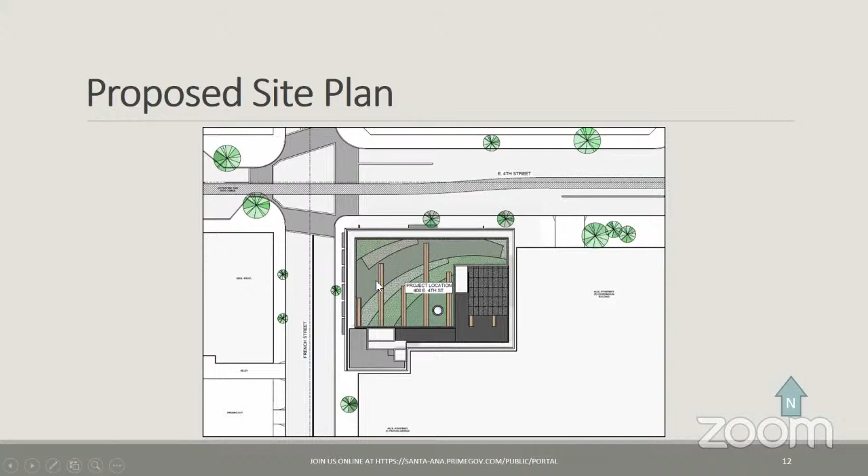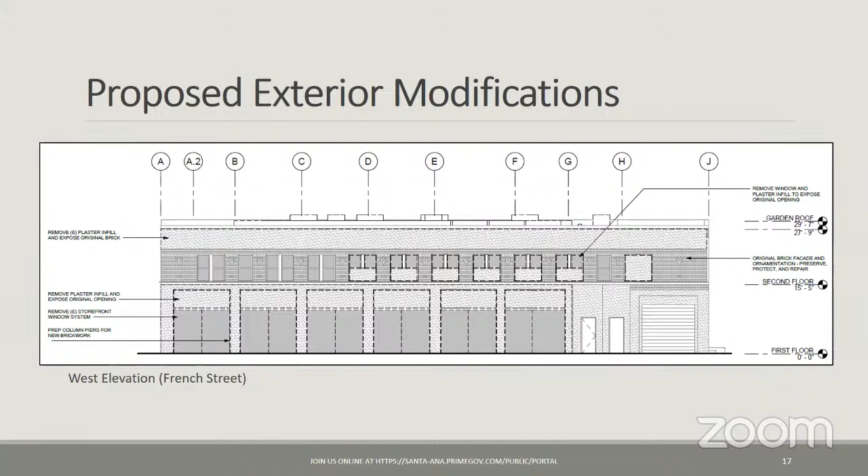This next slide shows the alterations along the west elevation, along French Street. They include the removal of the existing plaster infill to expose the original brick, the removal of the storefront system, the preparation of the column piers for the new brickwork, and the removal of plaster infill exposing the transom openings along here. The removal of windows and plaster infill exposes the original openings shown up here on the second floor, and there is preservation of the original brick facade and ornamentation. Again, the same elevation along French Street, but as a rendering to show those changes.

Staff has determined that the project complies with the Secretary of Interior standards for rehabilitation. The analysis determined that the proposed project meets the standards because the rooftop additions -- the penthouse structures for the stairs and elevator, minus the shade structure -- are contemporary in design, yet compatible with the materials, features, size, scale, proportion, and massing of the historic commercial building.

Most importantly, due to the additive nature, the rooftop addition allows for the option to be removed in a way that the essential form and integrity of the historic property and environment would not be impaired. Staff would like to note that the shade structure originally proposed is not included as part of the project moving forward. Lastly, many of the building's character-defining features and materials will be restored and retained, and the building would continue to convey its historic association with the early commercial development of 4th Street and remain eligible for listing in the city register.

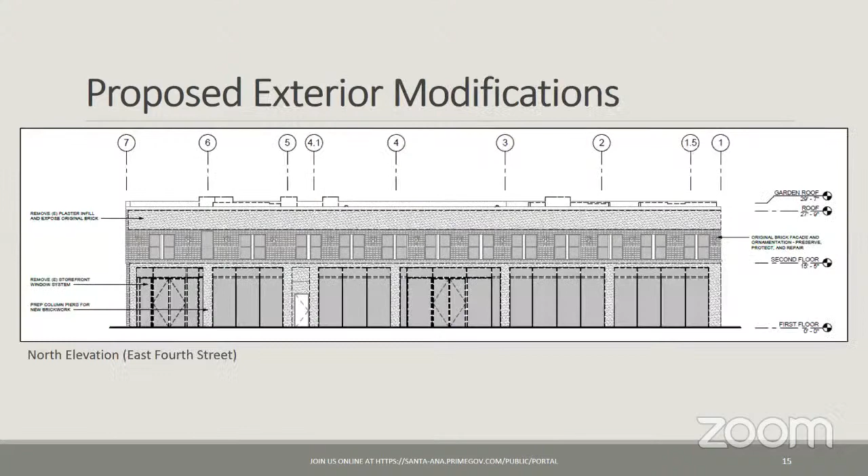If I have another question, going back to the facade on French and 4th Street - if I understood your comments, the supports between the windows, which I think you said were covered up, stuccoed over, and that stucco is going to be removed to reveal some sort of brick facade underneath. Is that to be uncovered and exposed, or demolished and new brick applied, along 4th Street?

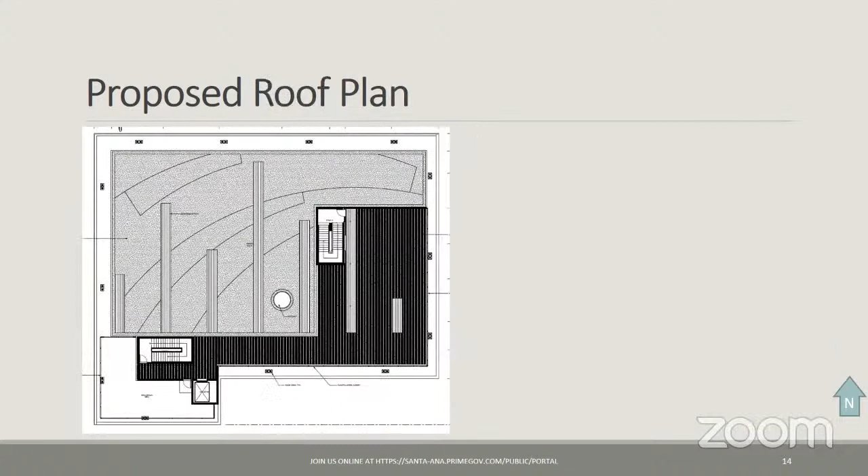What will the surface be? Perhaps the architect could explain that when we invite her up. Another question along with that, why isn't it enclosed like the other mechanical area with the stucco wall? The mechanical equipment, yes sir, oftentimes for building code purposes can't be enclosed. There are certain ventilation requirements.

Understood, thank you sir. Tim, yes, excuse me Chair, just to go back on one topic, we were talking about this being a church. This is the church that was down on the southern end of Santa Ana where the Legacy is being built, is that correct?

The Legacy apartments? Sunflower apartments, Legacy apartments down at the south end of the city. There was a church there. The Legacy is being built and the church is moving up to the center of the city. I believe that's the case, but the applicant can confirm. Okay, I'll wait for the applicant on the next question, so we'll go from there.

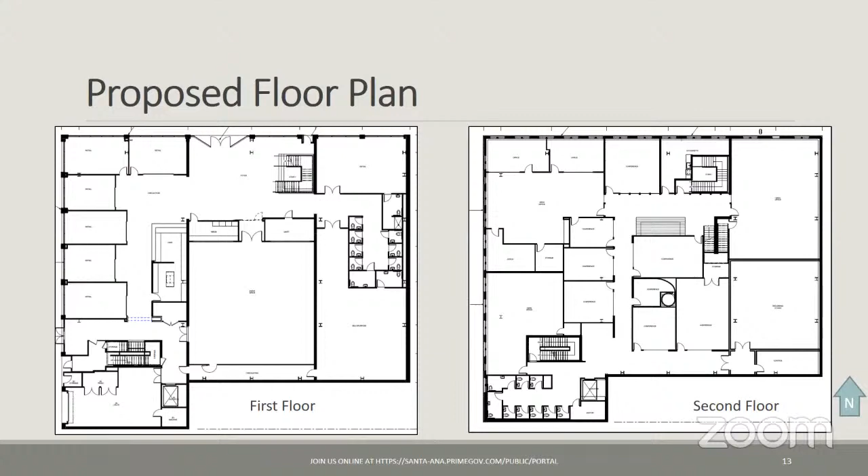Are there any other questions? Commissioner McLaughlin. Is the parking lot attached to this property, or is that just public parking? The parking lot, I believe, is for the apartment units. There's a public one along French Street behind, at 4th and French Street. I don't recall if that one is public — it might just be for the apartments, the condominiums. Okay, just curious.

Point of clarification, those are not apartments — that's the Spectrum Condominium Complex, which were apartments at one time but were converted into condos. But anyway, that's not part of your project. Are there any other questions? I feel like a broken record.

Okay, all right, you folks can sit down. Are there any members from the public that would like to speak on this?

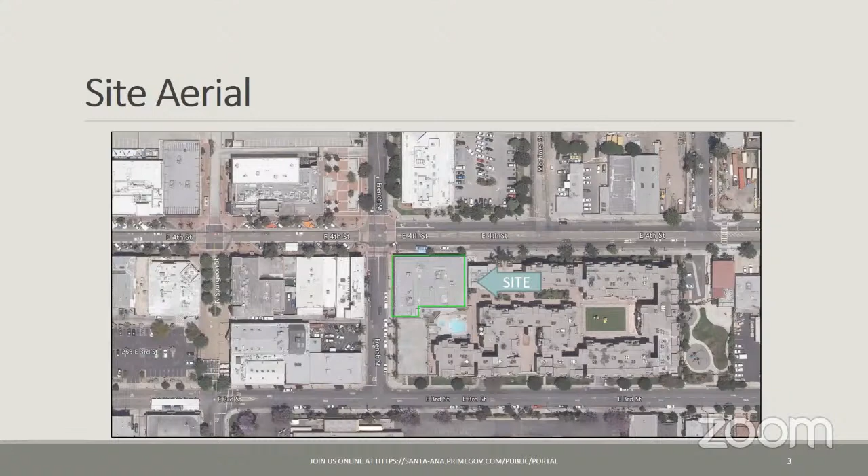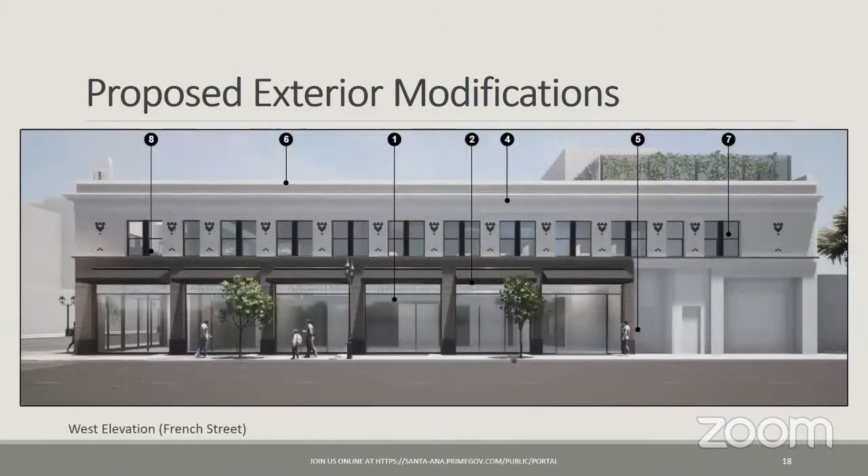Are you saying that the awnings represented are too shallow? Yeah, but they're not retractable, they're fixed. What we asked Mike Hare to do was to have retractable ones, and they came out a little further and look more historic. You see those awnings required on the Centaur building.

The signage issue has always been a problem in Santa Ana. We have backlit lighting or signage like what we have here, and it's not historical. We have it on the West End Theater, the Centaur building, the Yost building, and other buildings on Broadway.

They're backlit. Are you saying the signage on those buildings is correct or incorrect? Incorrect, they weren't. You didn't have neon, you didn't have backlit signs in the 1920s when these buildings were built, and they're not compatible to that historical look.

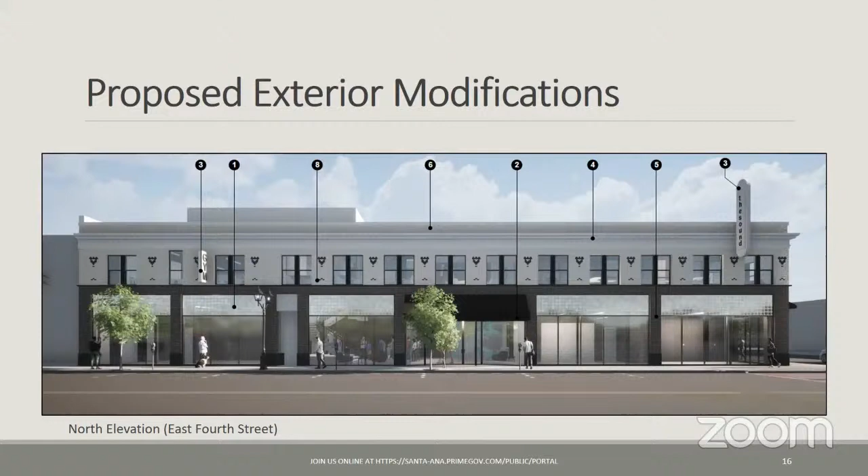Mr. Pedro, tell me, seems to me that don't we have a historic sign ordinance that was largely crafted by Joe Musel many years ago. Did you guys know anything about that, Phil? Are you aware of that? I'm aware of that. Joe was given $10,000 in 2006 or so to do one, but that was never approved by this commission or approved by the city council.

If you're talking about the draft of the historic sign ordinance, that was never adopted. Yeah.

The sign that's being proposed, which I asked about at one point, appears to me to be a blade sign is what I would call it. I'm not an expert on 1920s signage, but I'm assuming that sign would need to be lit with some sort of spotlights that would come out 3 or 4 feet from the facade and be shining on that blade sign. Is that what's being proposed? Sure.

Thank you for the question, Phil. My understanding is that we go through a separate signage approval process for the specific sign with Pedro, and I would assume we could take some of these things into consideration as we work through the approval process for the signage.

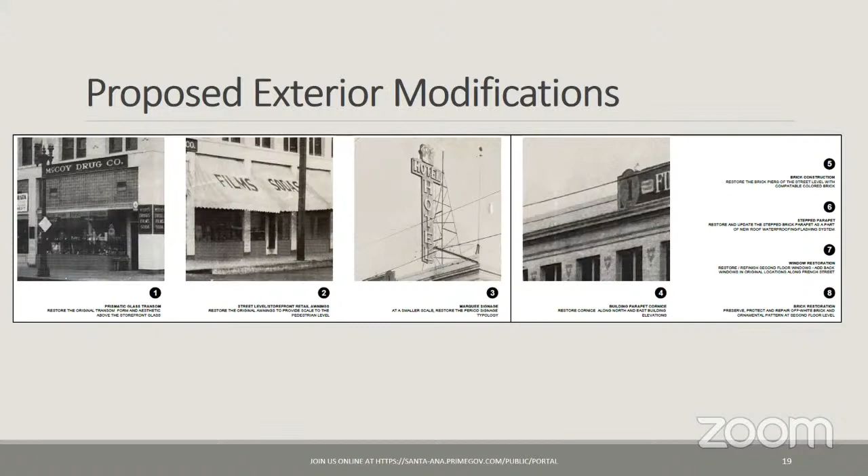In addition, there's new technology and new building code requirements that might require efficiency requirements for lighting. Sometimes neon is appropriate, sometimes it's not. Staff also works with applicants for signage to identify lighting that won't compromise the historic integrity of the building.

Front lit channel letters are something we don't normally allow. They're too abrasive, so we usually allow halo lit or backlit, which creates a softer light, or uplighting with external lights that shine onto the sign. Those are more appropriate for a historic sign, and you'll see them more common in places like downtown Orange, where they have neon signs, uplit lighting, or halo lit soft lighting. We would work with the applicant to ensure the lighting and sign does not compromise the integrity of the building.

With regard to the signage issue, that will become a separate issue, and perhaps we do need to look at the historic sign ordinance, and that's something this commission ought to look at. With regard to your comments about the awnings, I do remember that controversy, and you are correct, that's a good point.

I do think awnings make a huge statement on a building, and how can we address that? If the commission wishes, they could recommend a condition of approval to include a specific type of awning, or some sort of retractable awning that's much more appropriate, as the public mentioned. We could do that. Staff could also be given discretion to work on the final awning design, and if the commission has a specific example like the Centaur building, we can certainly look at that as well.

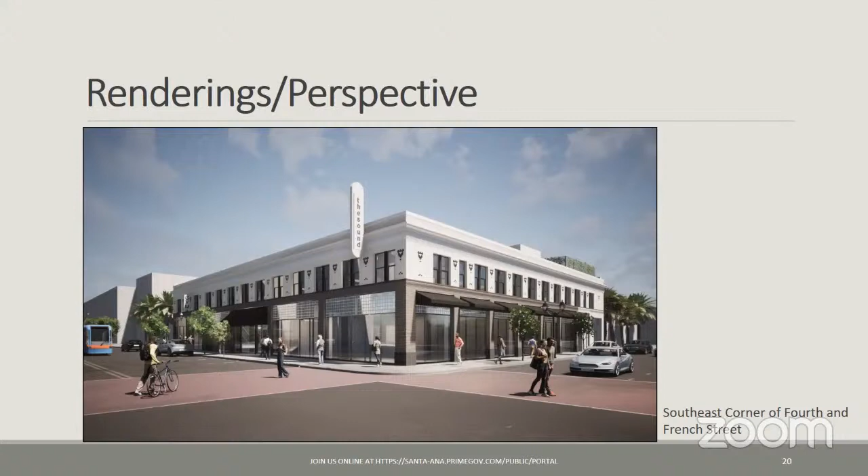Does the commission have any final questions of staff? Seeing none, is there a motion to approve this matter?

I guess I would say as amended. Chair, I would like to move that the commission adopt a resolution approving a certificate of appropriateness for historic exterior modification, application number 2022-03, with the condition of having appropriate signage and awnings.

And addressing the windows issue. All right, I second that. Okay, we have a motion and a second.

Secretary, please call for a roll call vote. Commissioner Carpenter, yes. Commissioner Christie, yes. Commissioner Hardy, yes. Commissioner Ship, yes. Commissioner Peña Sarmiento, yes. Commissioner Frazier. Commissioner McLaughlin, aye. Vice Chair Marashi, yes. Chair Rush, aye. Motion is approved with majority vote, with Commissioner Frazier absent.

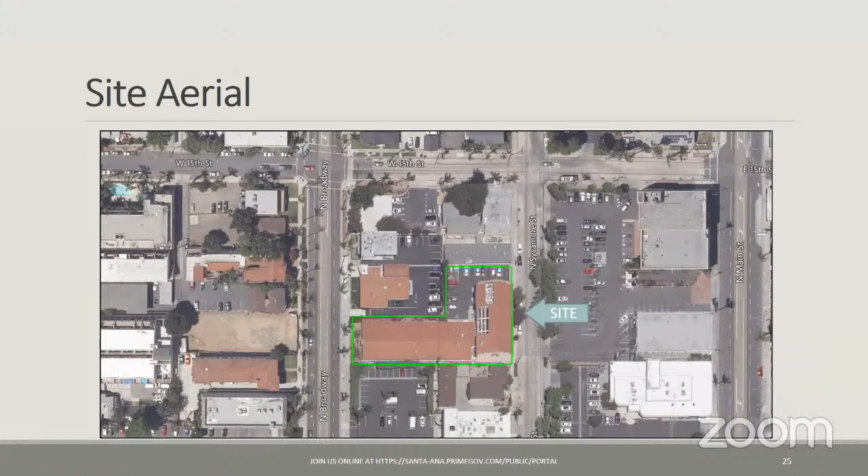The property is known as the Santa Ana Tustin YWCA building, and it's individually listed as number 63 on the Santa Ana Register. It was placed on the register in 2001 and categorized as landmark. The building was constructed in 1950 and dedicated in February of 1951.

The property is a late and modest example of the Spanish colonial revival style applied to institutional buildings in Santa Ana. It was built for approximately $114,000, designed by architect Harold Gimeno, and constructed by notable local builder Allison Honer.

The building was Santa Ana YWCA's first purpose-built headquarters and included a gymnasium, a kitchen, nursery, lobby, meeting rooms, and offices. The next couple of photos provide the site photos of the building as it exists now.

This first slide shows a southeast view of the 1-story wing north facade and the east view of the west and south facades.

This next slide shows the south view of the north facade of the 1-story wing and the west facade of the 2-story wing. It also shows the northwest view of the east and south facades from North Sycamore.

We've also included a couple of older perspectives of the site showing the east to west wing and the north to south wing here. The building was eligible for listing as a local landmark under Santa Ana Criterion 1 for embodying the distinguishing characteristics of the Spanish colonial revival,

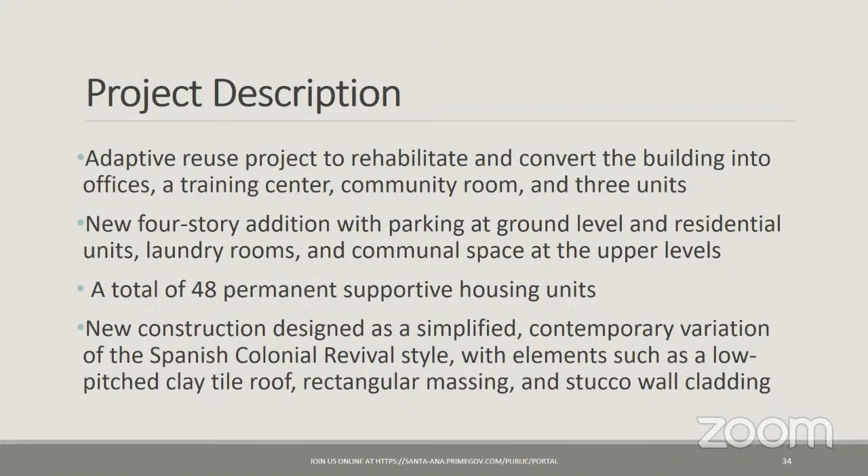This is just kind of a description of what I just provided. Now to go over the scope of work in better detail here, I'm going over a couple of site plans and floor plans to demonstrate the work that's being demolished, the work that's being kept, and the new area of improvement. So here we have the existing site plan.

This gives you a better understanding of that same situation. The east-west wing is highlighted here roughly—it's about 9,200 square feet or so. And the north-south wing is about 5,800 square feet.

What's being kept as part of the 1-story structure is approximately 126 feet of the east-west wing here. About 53 feet or so of the existing 1-story structure would be removed in order to accommodate the new structure. The entirety of the north-south wing will be demolished.

Here we have the proposed site plan. You can see that the portion that's going to be retained here includes 126 feet. And here we have the ground floor parking.

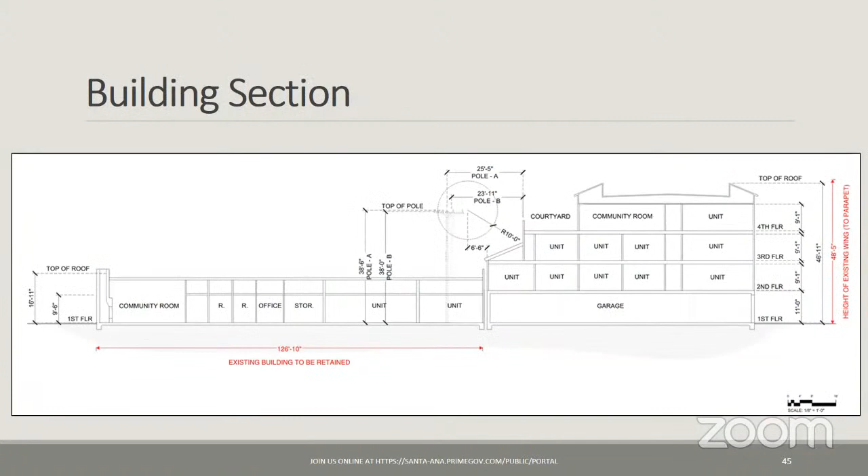Is this what you're referring to, Commissioner? Right, right. So there is going to be a space between the two buildings, right? I'll probably defer that question to the architect, but it looks represented that there's a space. There is a space, yeah, I'll talk to that one. Okay. I just want to make sure, am I saying that correctly? Okay, thanks.

Are there any other questions from commissioners? I have a quick question — is Edison going to remove that power pole right in the middle of things there? I hope. As currently proposed, no. It would result in more alteration of the historic structure, which we would advise against. So as part of their entitlement process, we're looking for ways for that to be accommodated as existing.

Commissioner Hardy: I'm curious about the elevator shaft, the tallest part. Is that a design element or is that something necessary? Why can't the elevator shaft end at the other roof, the tallest roof height?

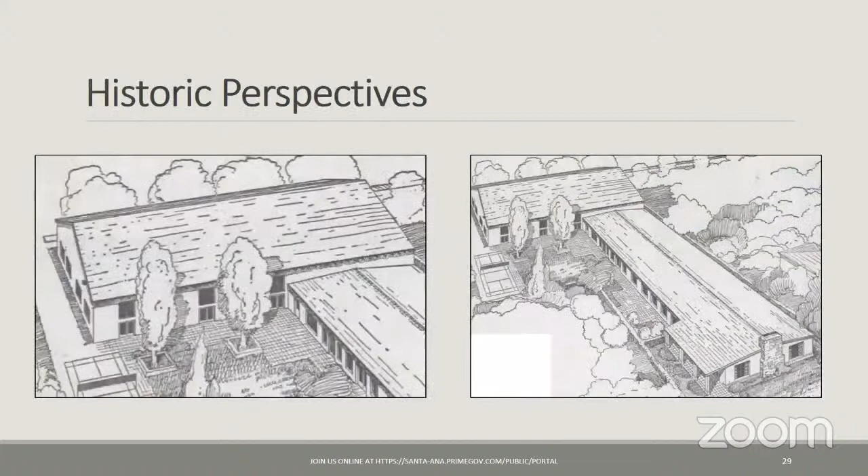The site needs it, for the ambiance of their guests, as well as just so the building has a better appearance. In my view, see all of that area, all that's being gobbled up by the new addition - I'm just curious, can't they add some more vertical landscaping?

Thank you, Commissioner. We do have a landscape plan as part of the overall entitlement. That's unfortunately not included as part of today's conversation, but they are proposing landscaping. I'm not sure if it addresses the concerns you're talking about, but that's certainly something that could be either discussed with the applicant or conditioned.

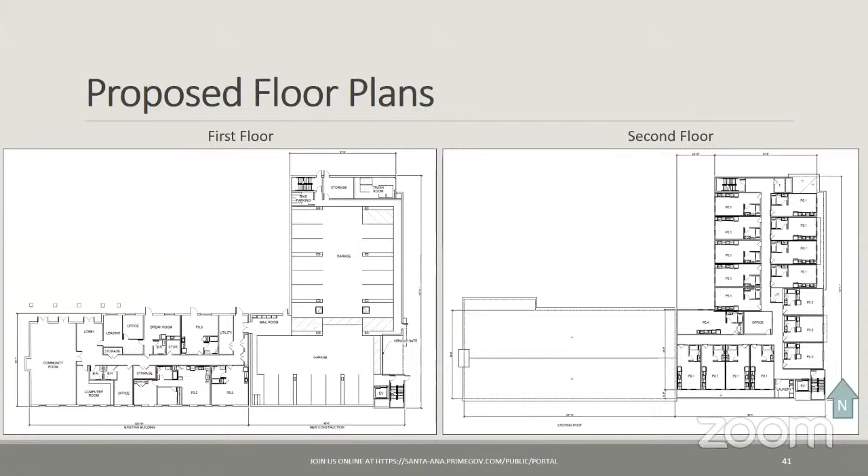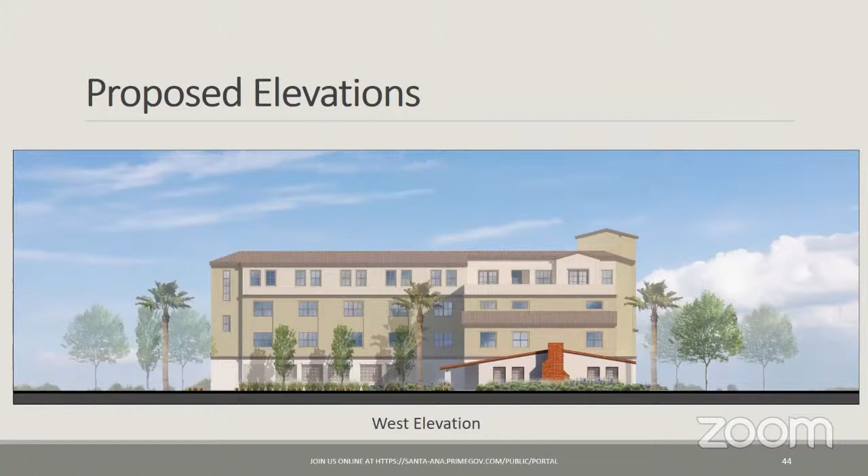Can you go back to showing some pictures of what the detail is on the new building? I know that the one from 1986 was, gosh, it was so badly done in terms of - they didn't do anything to try to make it compatible with the existing building. It was horrid. So I have no qualms about that building being demolished. It's as ugly as homemade sin.

But anyway, the roofing on this new building, is it going to be red tile to tie in with the existing building? Or is there some effort to - you can't tell by looking at this rendering.

If I recall, it was supposed to be something that would be compatible, and it's certainly represented as a red tile as well. It's shown as and represented as a red tile. We'll probably have to have the architect clarify that as well, but I want to say yes.

Well, of course, the new building is so much bigger than the building it's tying into, which is the historic building. And I recognize we're not trying to make the new building look exactly like the 1950 building, but it does need to be compatible. At this point I'll wait and defer, I'm sure the architect's going to come up here and make some comments. Are there any other questions from commissioners?

Commissioner Marashi: Can you go back to page 39, please? The original part of the building, the historic parts, the 126-foot, 10-inch piece, correct? Pedro, the 126-foot, 10-inch piece is the historic part we're talking about. The entire historic part is this first wing here. Okay, so on page 39, the 53-foot, that is part of the original historic piece, correct?

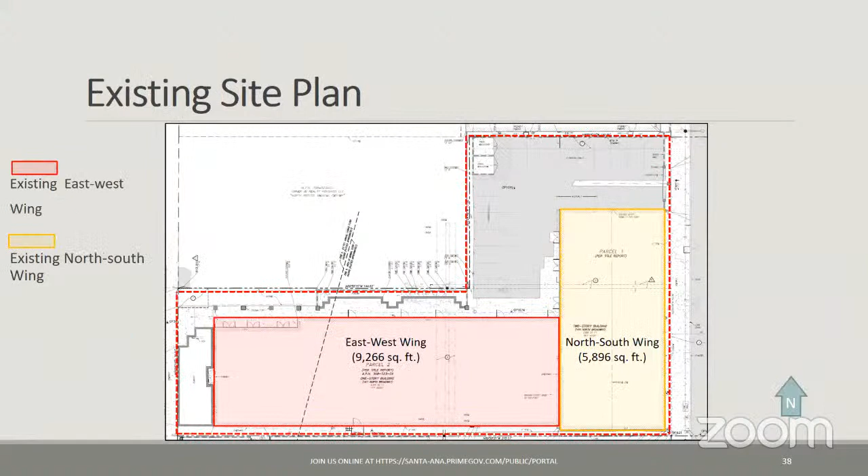Do you want to address the issue of landscaping? Oh sure, so we do have a landscape architect engaged, and what you're not seeing is a landscape plan. An additional thing that may have gone unnoticed is that when the building was built and modified in '85, you'll notice that the current gymnasium is nearly to the property line of the site. Our new portion that we're building the north-south wing on is actually set back from the property line almost 10 feet. And the parking lot you're seeing on the west side of that north-south wing is actually going to be open space for our tenants. So there will be some softer landscape features where we will have the ability to add some landscaping trees in that area where it's now asphalt. So I don't have the landscape plan in front of us, and it's not fully vetted out or designed, and we have not gone through entitlement yet fully.

So there's still an opportunity to work with the city on exactly what the landscaping is going to be, but it's going to be more than what you're seeing there, which is just asphalt.

Chris, if you could address the commissioner's question about what looked like a gap between the buildings, the connection between them. That's what I also wanted to talk about.

What you're seeing there is that the historic building and the new construction will be physically separated by about a 12-inch gap, but you're not going to see through the buildings, so that elevation is a little misleading. There'll really be a cover plate there. That gap is for seismic separation between the old building and the new building. We need a little room between them so the buildings can move independently and not bang into each other. What you'll end up seeing—well, no one will really see it because it's on the side of the building—is an aluminum cover plate that'll be painted to match one of the adjacent paint colors.

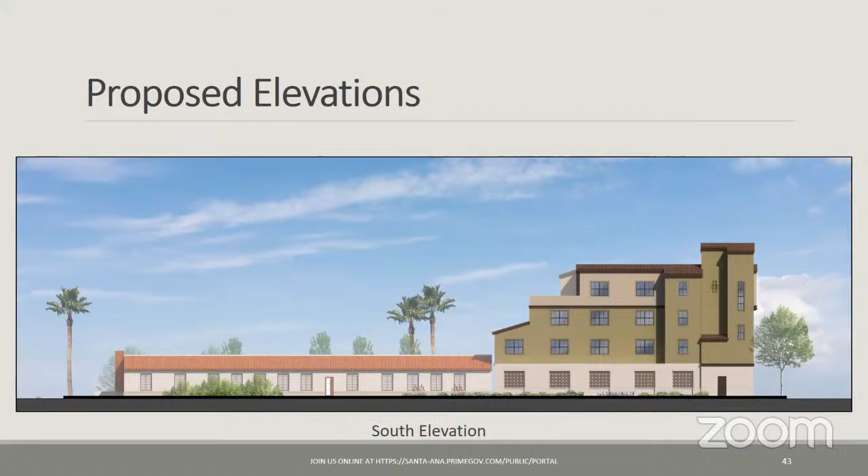My question to you is, how much of what we lose do you see from a street view? Can you say? I can't imagine that it's visible from Broadway. It's fairly deep—let me see if I can go. Yeah, you have an existing structure here, it's pretty narrow. I don't think you can see it from the street. Okay, thank you.

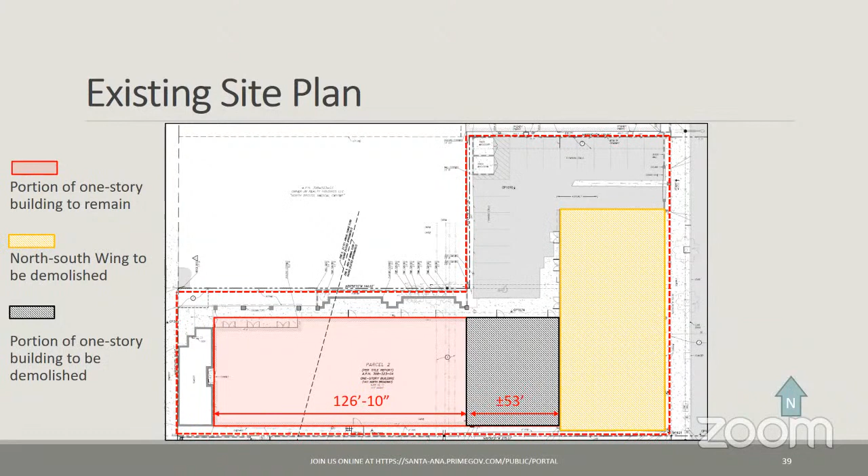Any other comments from the commission? Okay, all right. At this time, I guess I would entertain a motion to approve the application.

Anyone like to make that motion? Okay, Commissioner Marashi? Oh, Alberta, I'm sorry, Alberta. The reflection on these things is, Jesus, I feel like I'm in a house of mirrors or something.

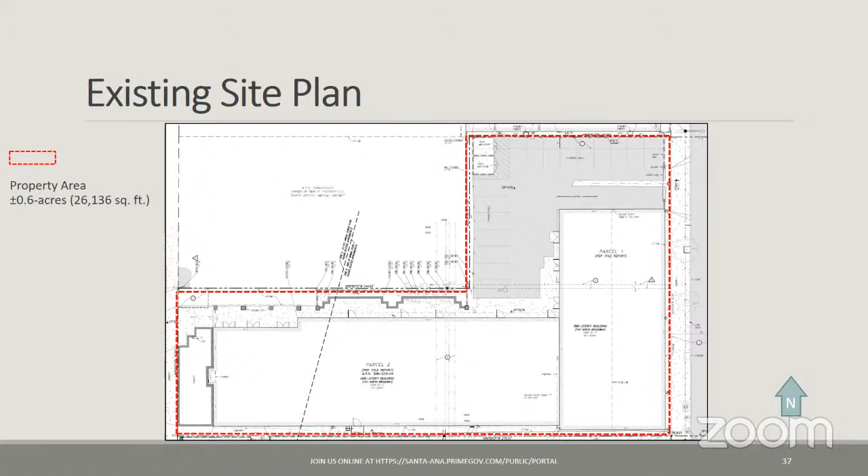Okay, Commissioner Christie. I move to adopt. I'm sorry, I left my glasses at home. Could you put it on the screen there? Thank you. Now I can see it.

I move to adopt a resolution approving a certificate of appropriateness for historic exterior modification application number 2022-02, with a condition of landscaping of the building on the back side where Sycamore is, and on the side of Broadway, so that it would bring the building to life.

Do we have a second? I'll second that. Okay, Commissioner Hardy. So it's been moved and seconded. Secretary, please call for a roll call vote.

Commissioner Carpenter, yes. Commissioner Christie, yes. Commissioner Hardy, yes. Commissioner Shipp, Commissioner Sarmiento, yes. Commissioner Frazier, Commissioner McLaughlin, aye. Vice Chair Marashi, yes. Chair Rush, aye. Motion is approved with majority vote, with Commissioner Frazier absent.

Okay. Been a long road for you. Yes, congratulations. Okay, this concludes the public hearing and business calendar of the Historical Resource Commission.